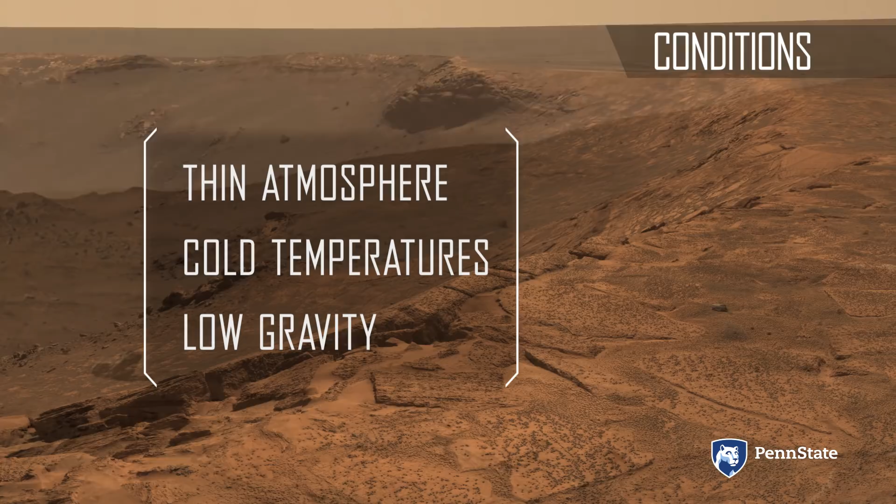Conditions on Mars are inhospitable and pose big challenges to human life. Because of the expense and limitations of space travel, we will need to maximize the use of indigenous materials and resources. The proposed strategy results from the study of the relations between three different but interdependent subsystems related to materials, printing system, and design. Our research is concerned with modeling the complex relationships between the associated variables.

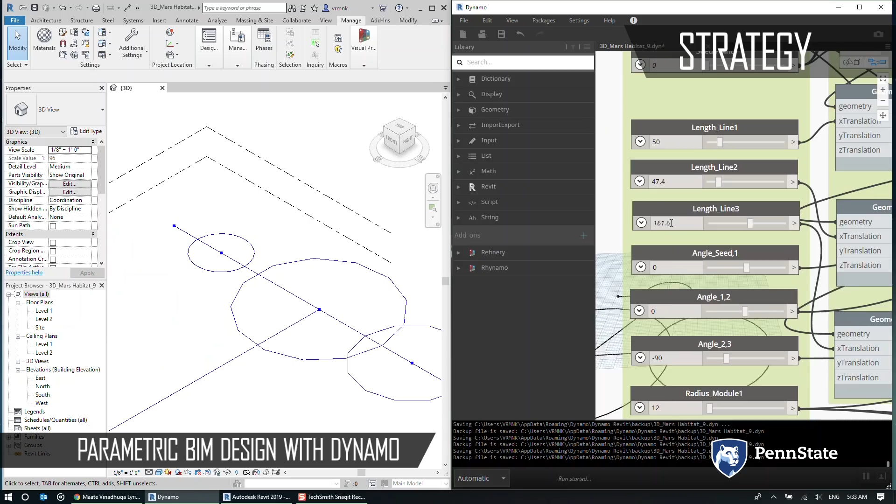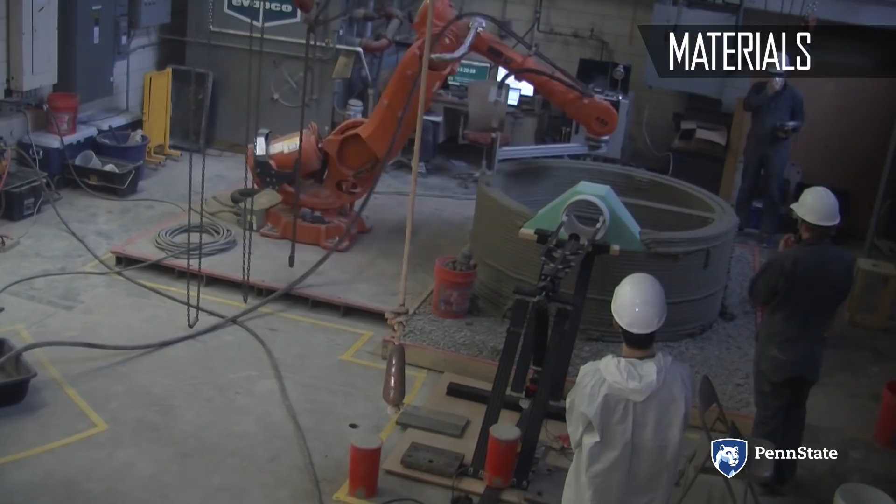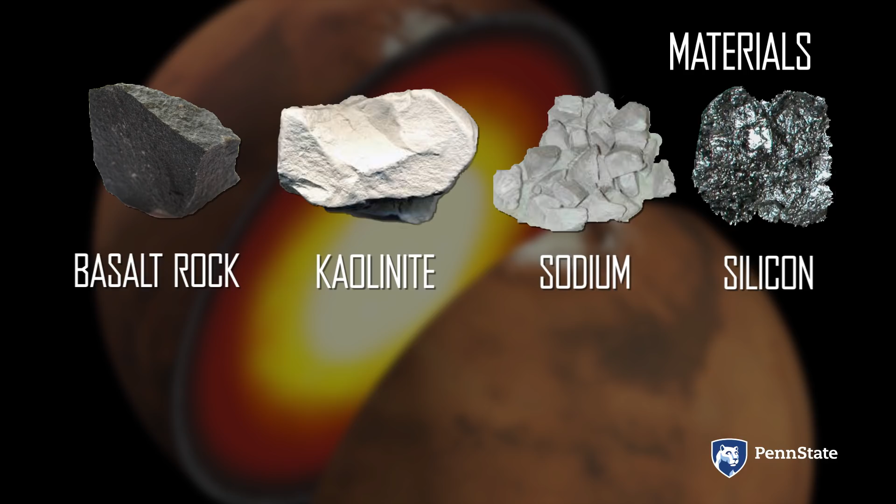Our strategy builds on our current research to develop low-cost housing on Earth using parametric BIM design and additive manufacturing. The construction process involves a robotic arm printing a geopolymer concrete mixture called Marscrete. Marscrete consists of indigenous minerals, including basalt, which is crushed and used as aggregate. Kaolinite has to be calcined to obtain metakaolin, which is used as binder, and sodium and silicon compounds, which are used as agents to activate metakaolin with water, obtained from ice.

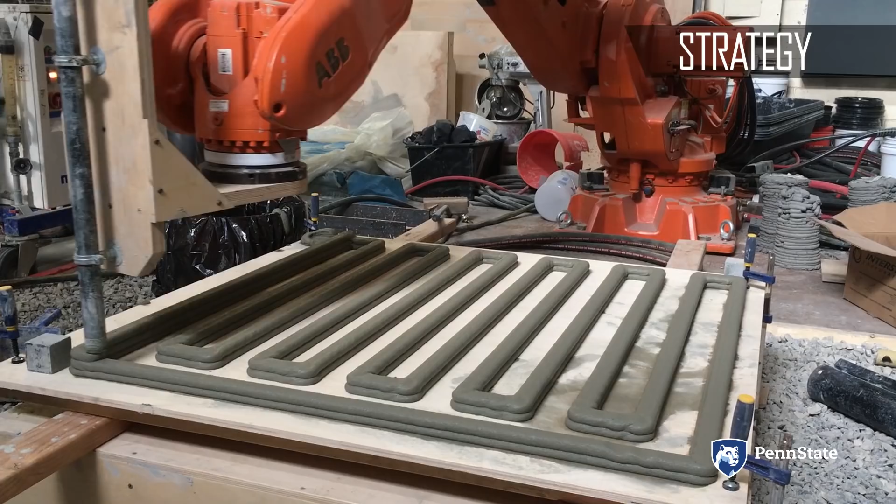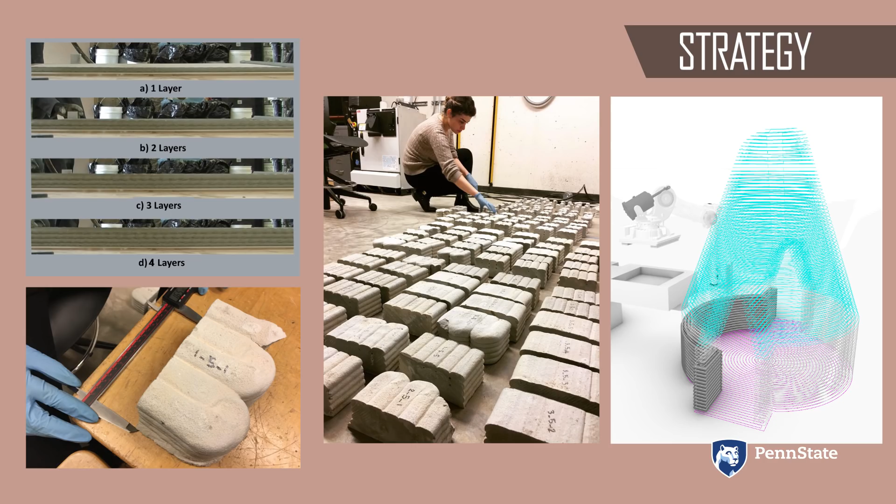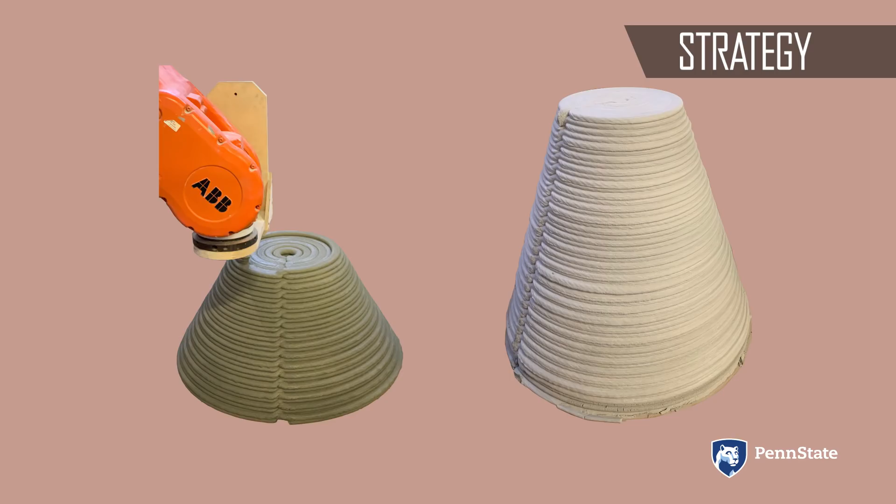We understand the hydration reaction in microgravity by studying the solidification of concrete aboard the International Space Station. We are characterizing the material behavior by checking its printability and its shape deformation during the printing process. Results are then considered in the design of the toolpath. We are also studying the affordances of the printing process in terms of form and structure to determine the impact on design. An additional exploration path concerns the study of material effects to create aesthetically pleasing surfaces, both in the interior and exterior.

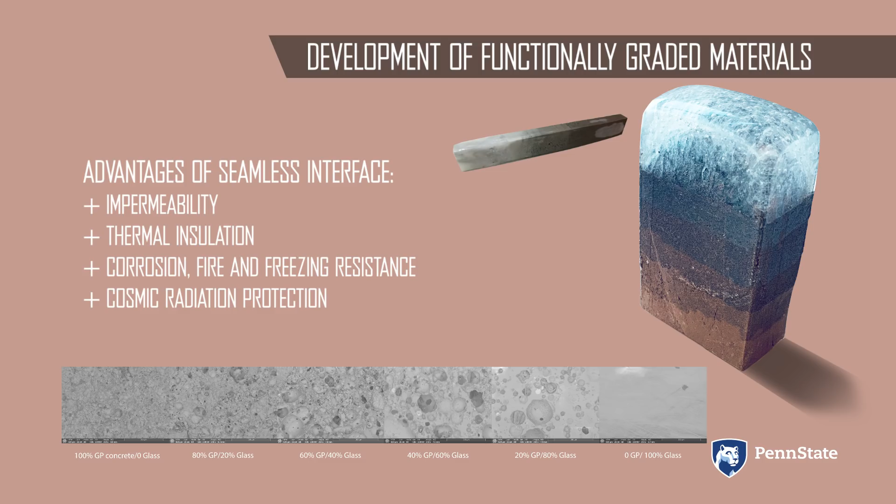Another key aspect stems from our research on the development of graded composite materials that permit a seamless and impermeable graded transition between opaque and transparent surfaces, such as our engineered geopolymer concrete and borate glass. The composite material is lightweight, thermally insulative, resistant to chemicals, freezing, and fire, as well as impermeable and protective from cosmic radiation. This technology promises to have significant impacts on building processes, architectural language, and the spatial experience of dwellers.

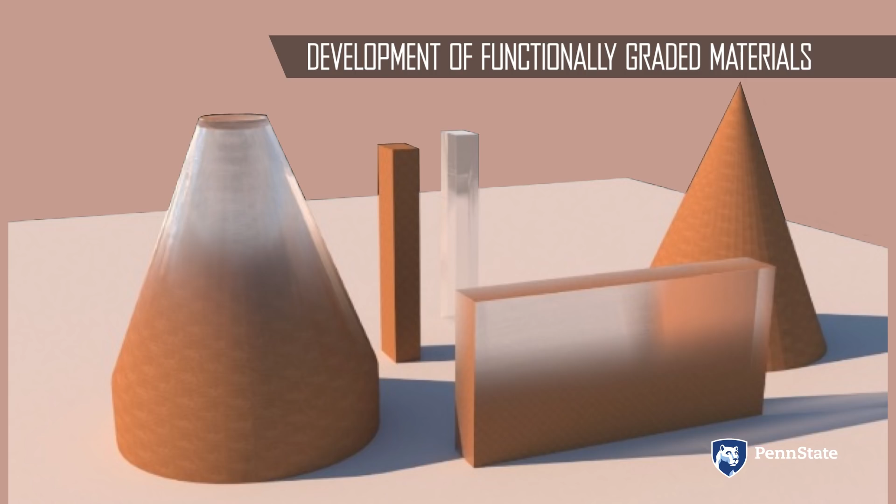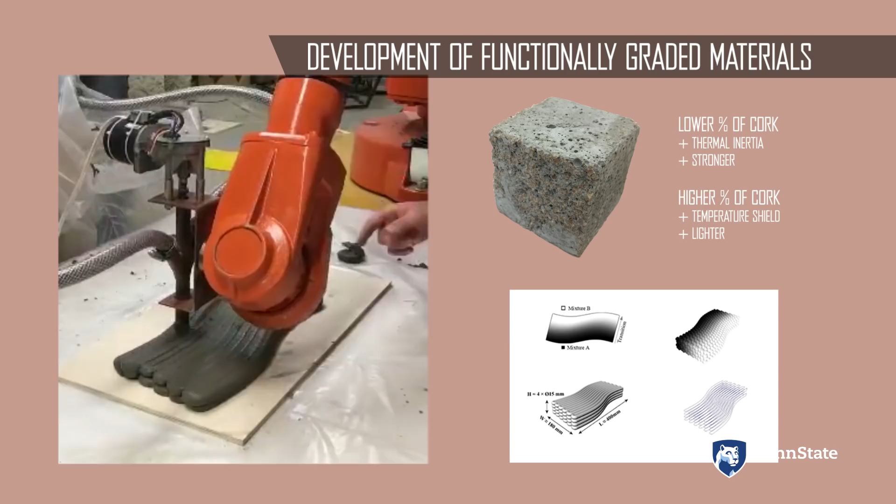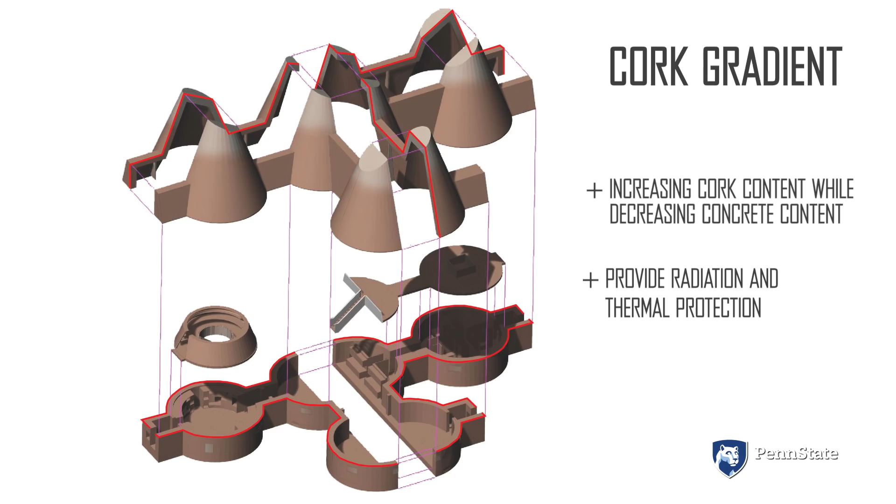Another key aspect is the development of functionally graded materials obtained by progressively replacing sand with lightweight aggregates, such as cork granules, which are used in the heat shield of spaceships. The selective use of functionally graded materials will enable us to optimize the performance of the habitat from the structural, optical, and thermal viewpoints. The glass gradient will increase towards the top to provide for ambient light. The cork gradient will increase towards the exterior surface of the walls to create a protective layer to shield the habitat from cosmic radiation and low temperatures.

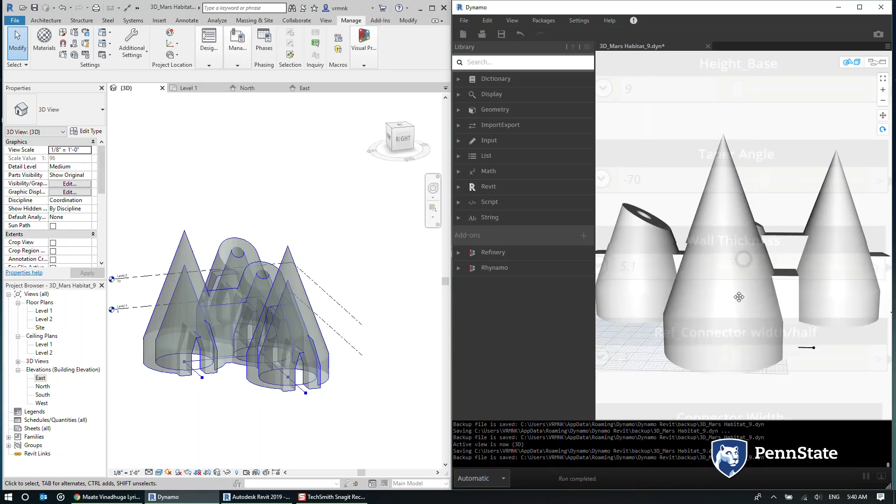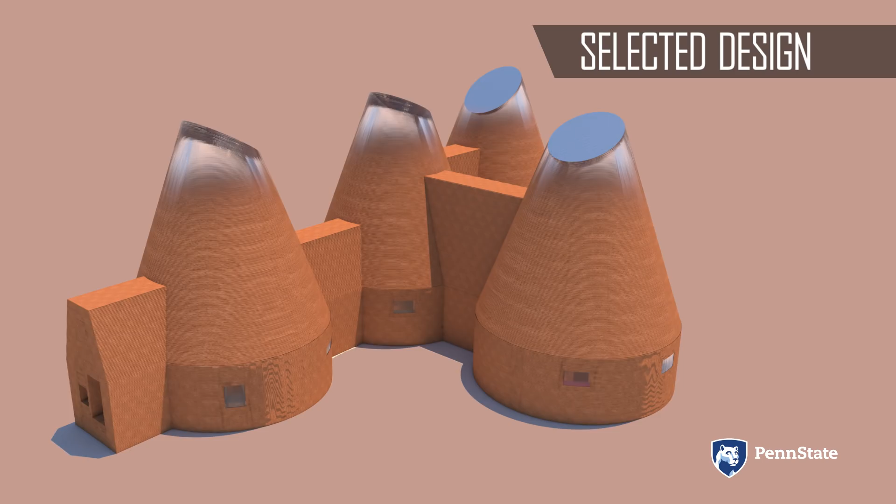The design of the shelter is based on the constraints derived from our study of materials behavior and the printing system. These constraints were encoded into a parametric design model in Revit using Dynamo, allowing us to quickly explore different design configurations. They were also considered in the development of the toolpath generator and the construction simulator. Among multiple possible design options, we chose one to illustrate our concept. Each unit is composed of a protective shell made from indigenous geopolymer concrete and a lighter interior constructed from both indigenous geopolymer and recycled plastics, with 2 floors.

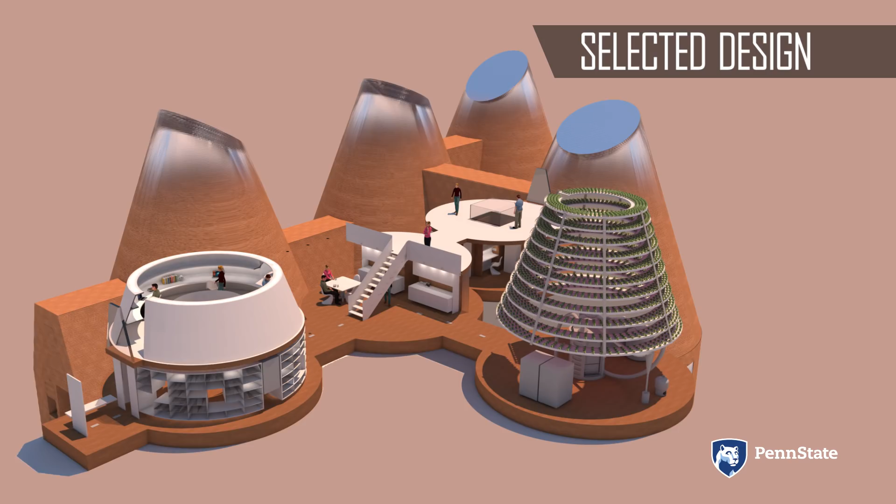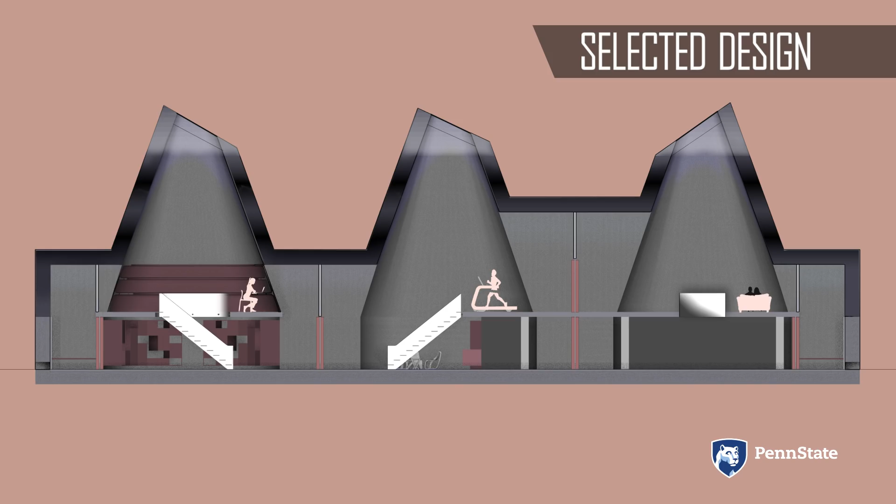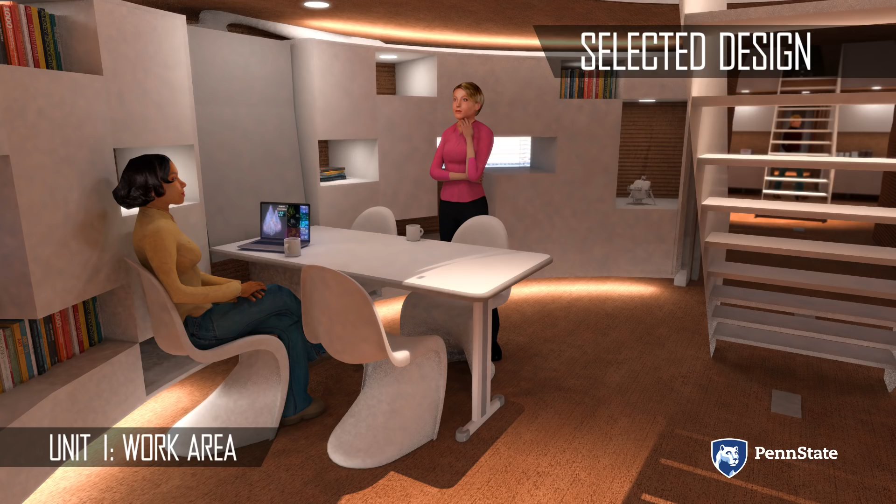By manipulating the seamless transition from geopolymer to glass, we can provide 2 types of openings: from above, giving each unit ambience lighting, and from sideways, allowing for views towards the Martian landscape. There are 4 units for work, living, sleeping, and gardening. Entry chambers on each end of the habitat enable access from the exterior and emergency exits. The first unit includes a wet lab, meeting area, and storage on the first floor, and individual workspaces on the second floor.

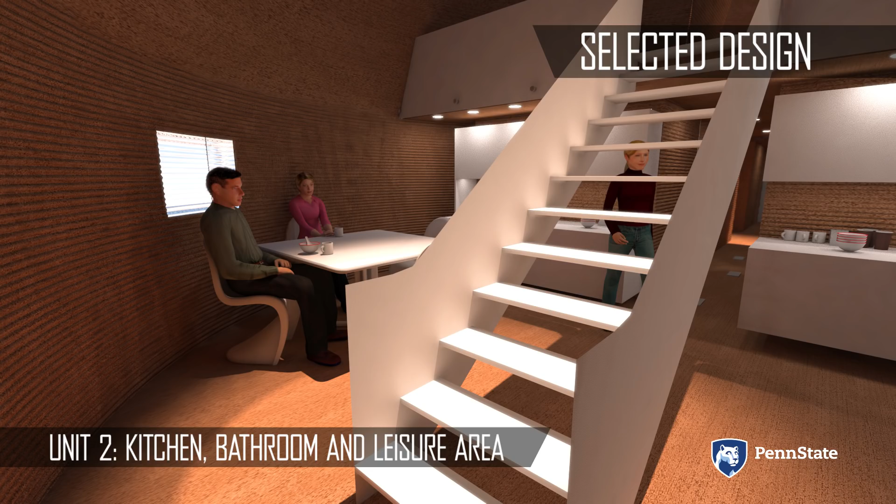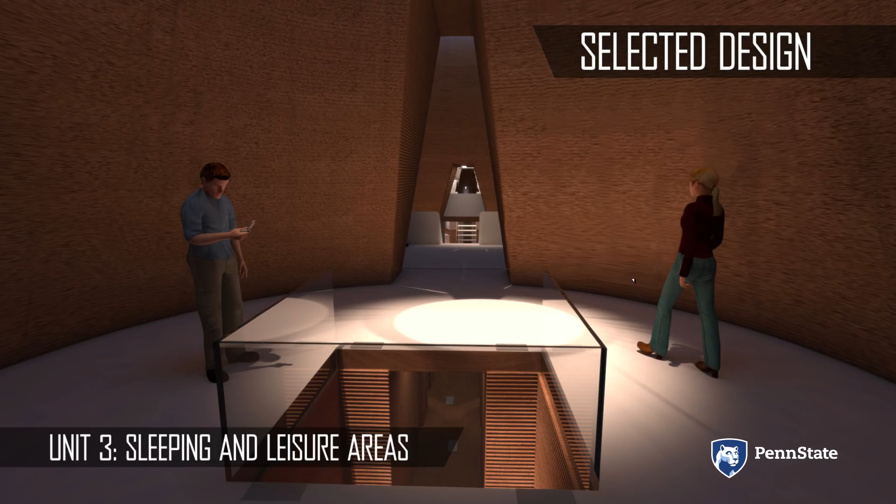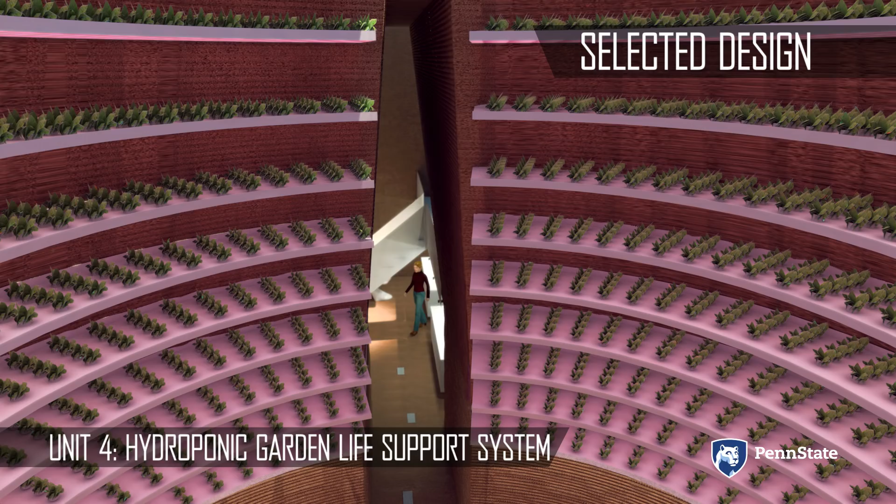These 2 different workspaces are articulated by a staircase. The second unit hosts the dining area, the kitchen, and bathrooms on the first floor, and a leisure area on the second floor, accessed by a second staircase. The third unit includes the sleeping quarters on the first floor and workout and leisure areas on the second floor. The design was conceived to enable visual communication between the various units and floors, thereby offering a spatially rich living environment. The fourth unit contains life support and hydroponic systems with provisions for emergency situations. Each unit can be sealed and will have life support capability during repairs.

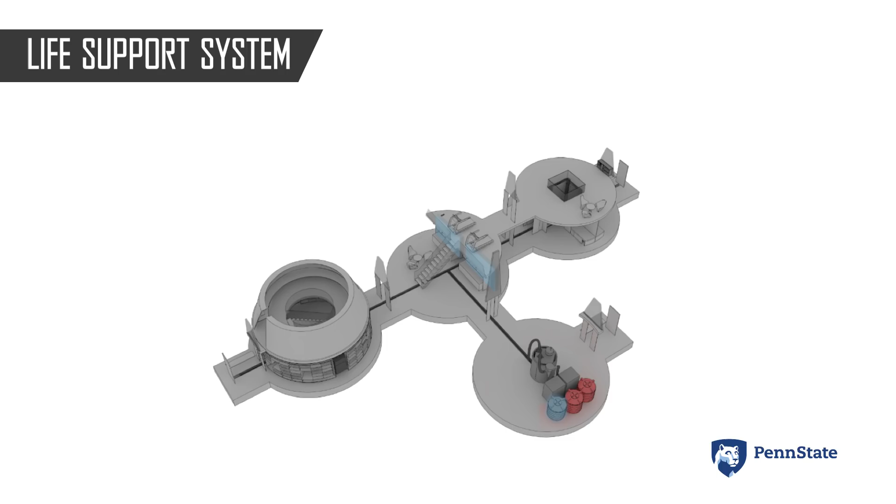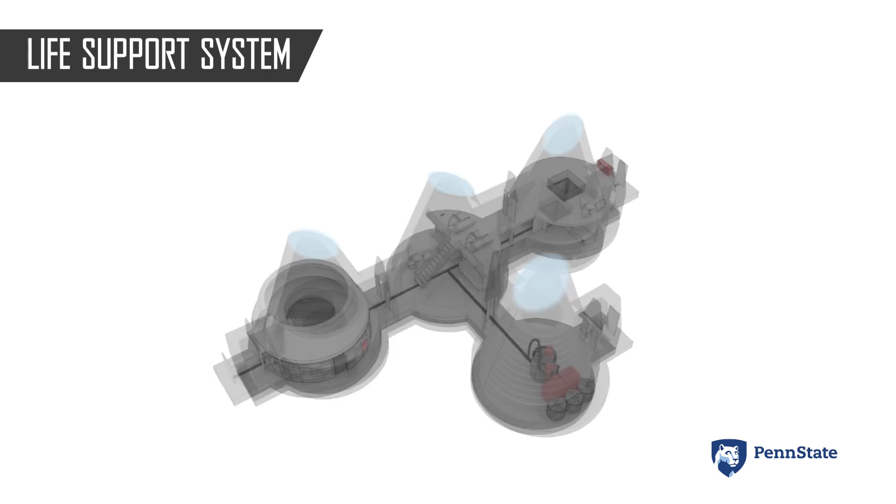The hydroponic system in Unit 4 produces food and oxygen and treats wastewater. Floor ducts efficiently distribute all systems supplying clean pressurized air, water, and electricity. Gray water returns through the sanitary piping to be treated by the hydroponic and mechanical filtration systems. The wet wall distributes all clean and sanitary piping to the kitchen and bathroom fixtures. Piping for the wet lab branches out toward the work unit, which is also equipped with fume hoods for noxious fumes from chemical experiments. Solar film and nuclear thermoelectric generators create electricity, while two uninterrupted power supply units keep consistent power through periods of low energy production.

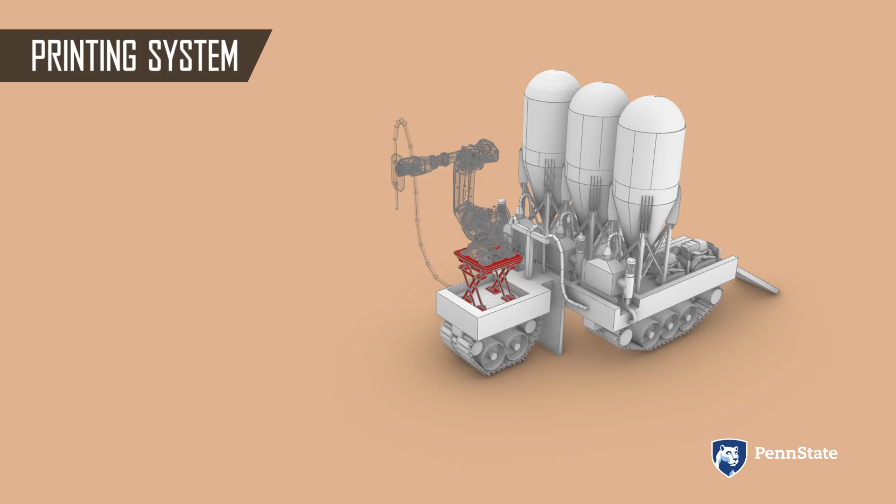The printing system is mounted on a rover. It includes silos where different processed materials are stored. For instance, concrete mixtures with sand, cork, or glass as aggregate. Each of these silos is connected through a conveyor to a dual mixer and pump. Each pump mixes the concrete with water and then extrudes it. By changing the relative speed of these pumps and using a dynamic printhead, it is possible to obtain concretes with different gradients. The dynamic head extrudes through a hose connected to a nozzle mounted on a robotic arm. A retractable dome guarantees a sealed and controlled environment with proper conditions for printing.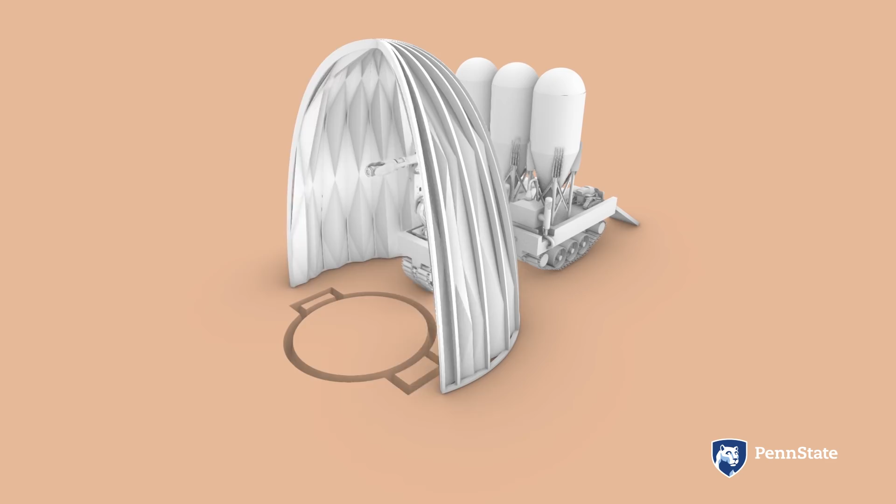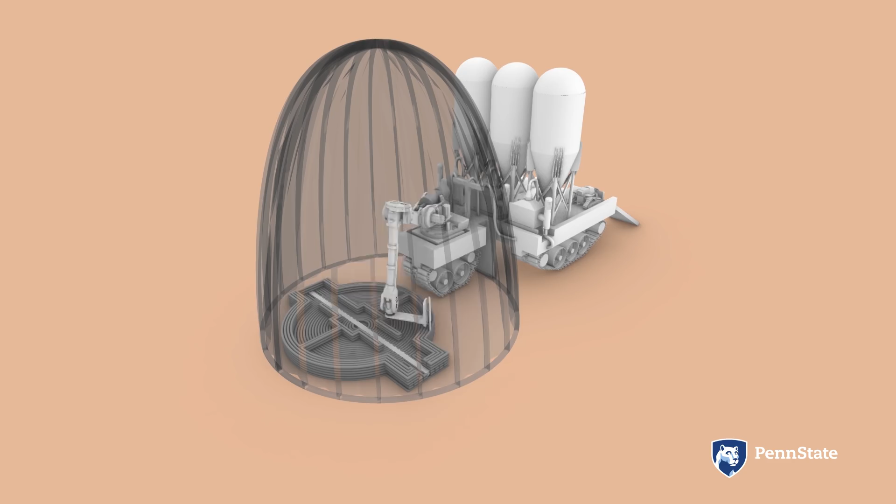Once at the desired location, the robot levels the ground and digs a trench. Then the dome is closed and printing begins. First the foundation footing, and then the ground slab. The exterior and the interior walls are printed at the same time. Penetrating frames are placed where required as walls are printed. Then it resumes to print the inclined walls, which become the roof, enclosing the habitat.

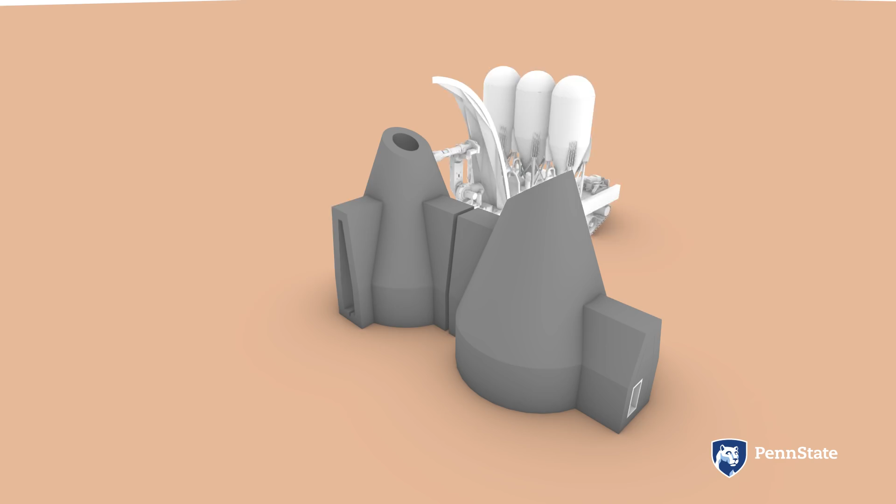Once one module is constructed, the rover moves to print the next module, and so on until the whole habitat is built. Then the habitat is sealed by enclosing the ports and placing connectors between units. These connectors have the mechanisms that will seal each unit in the event of an emergency. Stairs, rails, and furniture are then printed using small printers, and the installations are mounted. The habitat is then ready to inhabit.

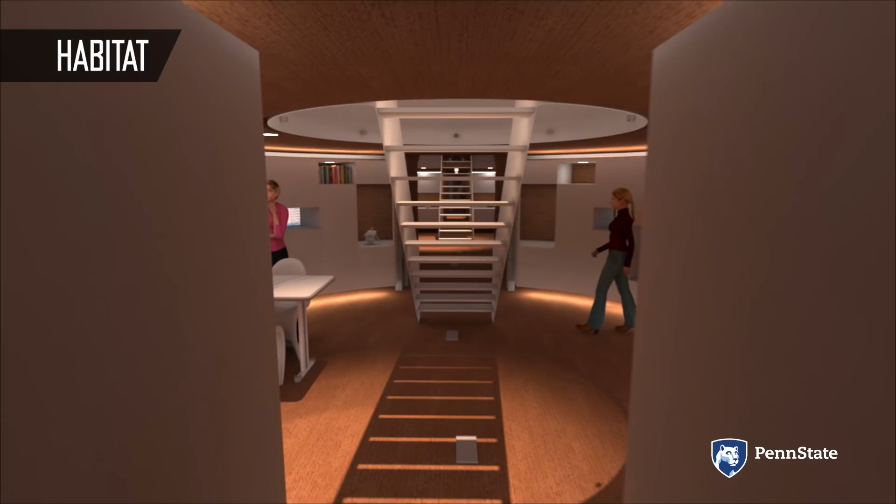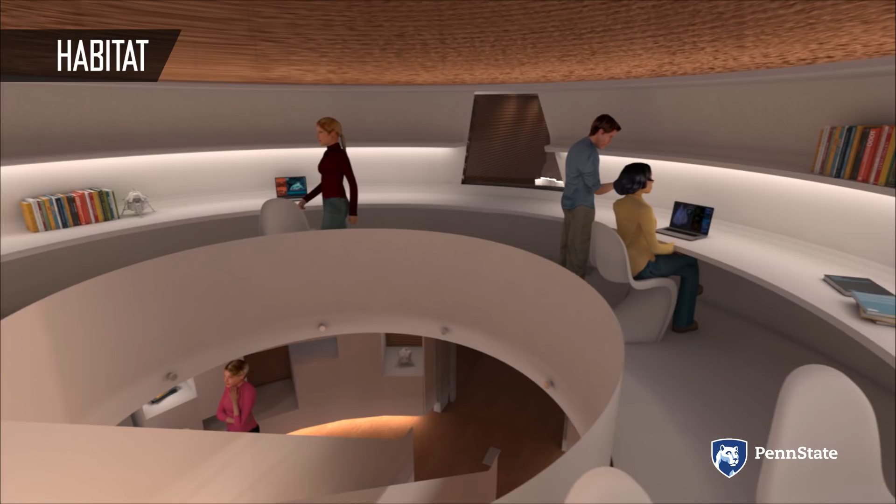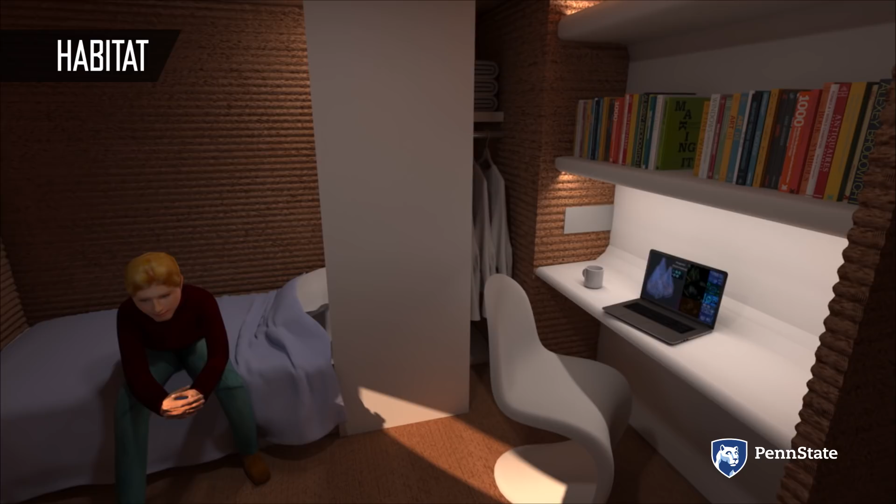Motivated by additive manufacturing technologies and advances in material sciences, our research has become a platform to explore various interrelated topics that inform and transform design processes and the language of architecture. The conical spatial volumes inspire awe as our gaze scans their archaic and simple capacity, as the seamless transition from concrete to glass, united in a single monolithic structure, elevates understanding of their properties while providing an uplifting spatial experience.